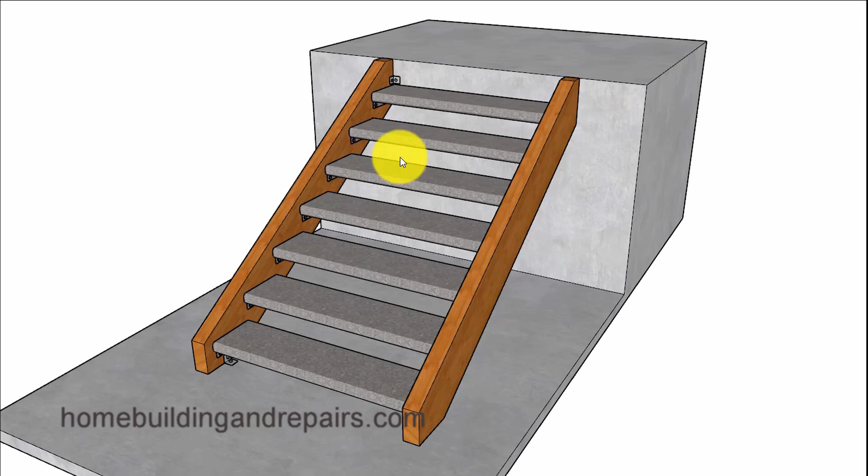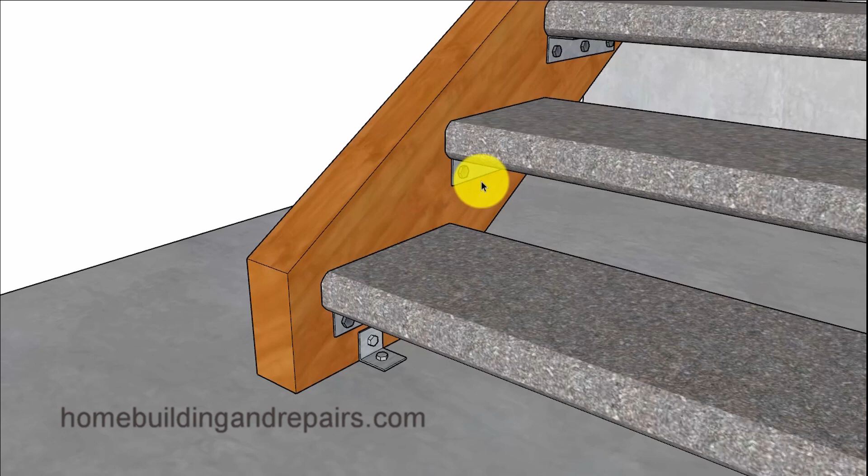In this video, I am going to provide you with two different types of concrete treads that could be attached to a wood stringer with metal brackets or even metal brackets attached to metal stringers. And these are the most common ones that I worked with.

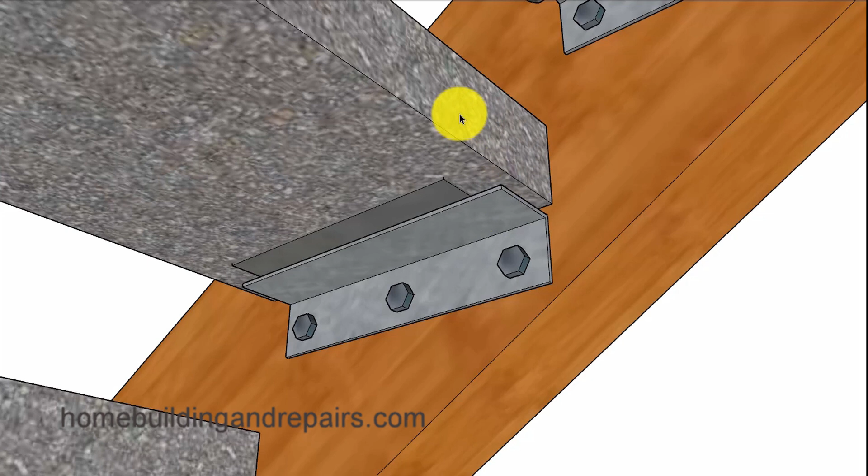And this would be a concrete tread with a metal plate located somewhere on the side. And then the treads would be positioned in the right spot and then welded, and are usually going to be the easiest ones to make small, minute adjustments to in case the stringers aren't located in the right spot or the brackets when building stairs like this.

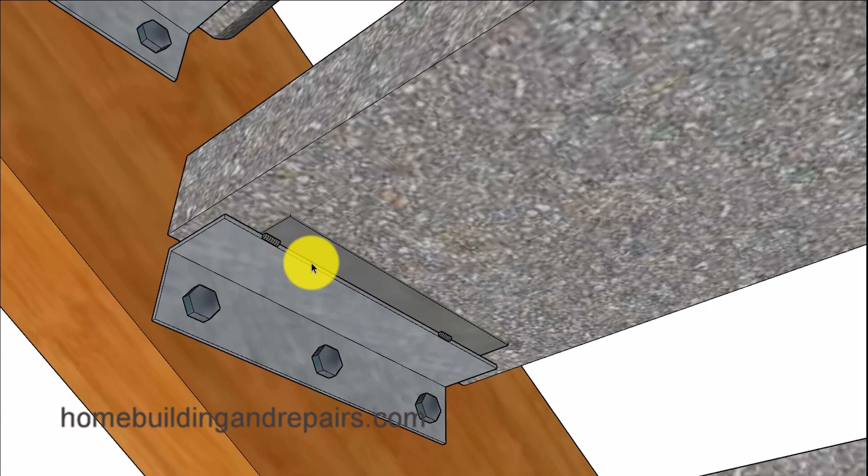So metal plates on both sides, and then they were often just tack welded in maybe 1, 2, or 3 spots. However, I have seen them welded all the way across. And that seems like it would be the best way if the tread and the bracket wouldn't separate somehow from all of the heat. And I have seen these welds break. So here's the tread, here's the metal plate.

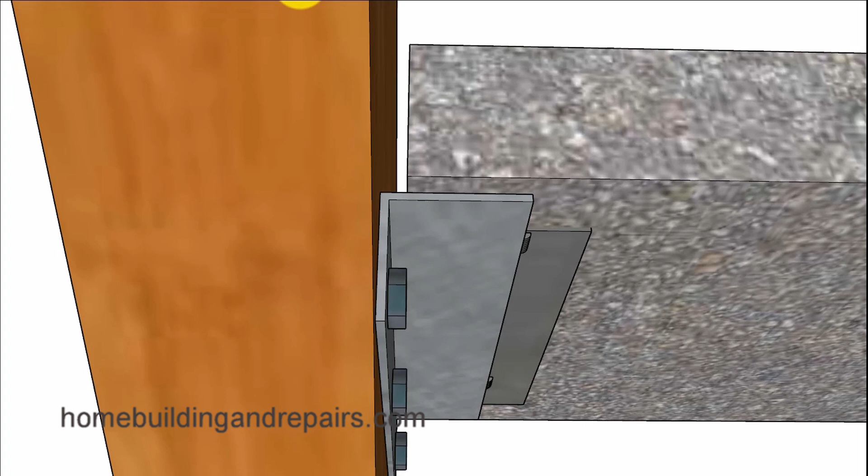And if you were looking for something like this, they can usually be found on the internet under precast concrete stair treads. And it's always going to be a good idea to have about 1/4 of an inch to a 1/2 inch gap between the wood and the concrete, just in case the concrete absorbs some moisture and then transfers that moisture into the lumber over a long period of time, causing it to rot. And of course, that was usually my job, to replace the wood stringers and reattach the concrete and the brackets to them because they were not maintained.

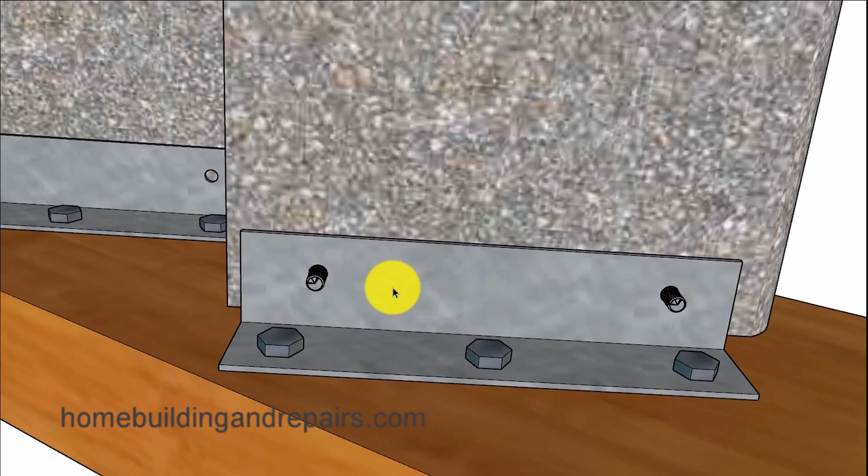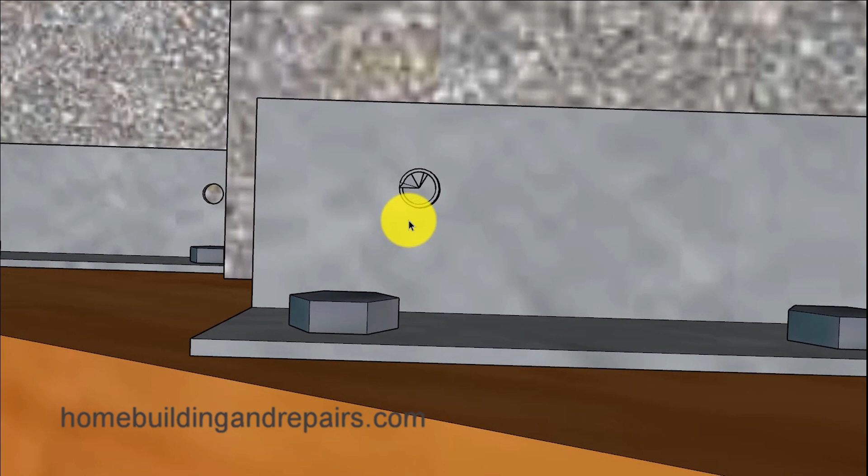And the next method for installing precast concrete treads would be to have a couple of bolts sticking out of the tread that can be attached to a metal bracket. And this is one of the reasons why I'm making the video, to point out that these brackets need to have some type of a slot in them or a larger hole. Otherwise, you're going to have a difficult time attaching the treads, because if these brackets are off just a little bit, you will not be able to install the tread.

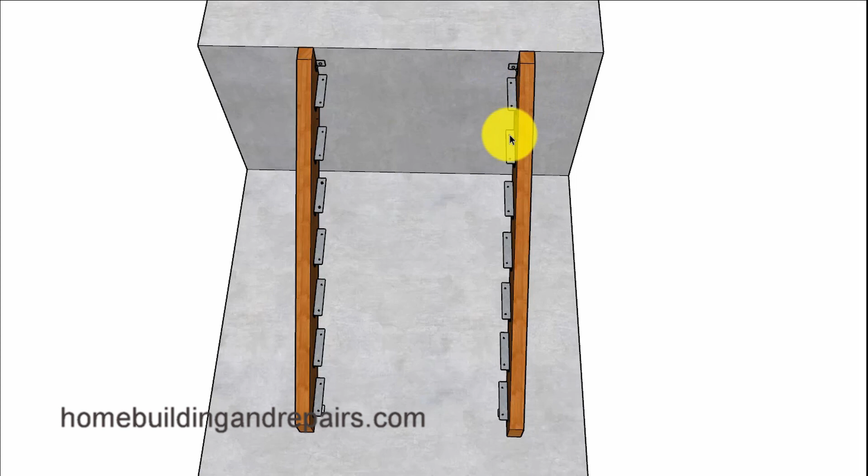And even if the brackets are installed in the exact same spot on both sides, then you would need to make sure that nothing would be out of square up here, or that the stair stringers were installed square to the surface that they are going to be attached to perfectly. And this is why I wouldn't use this process.

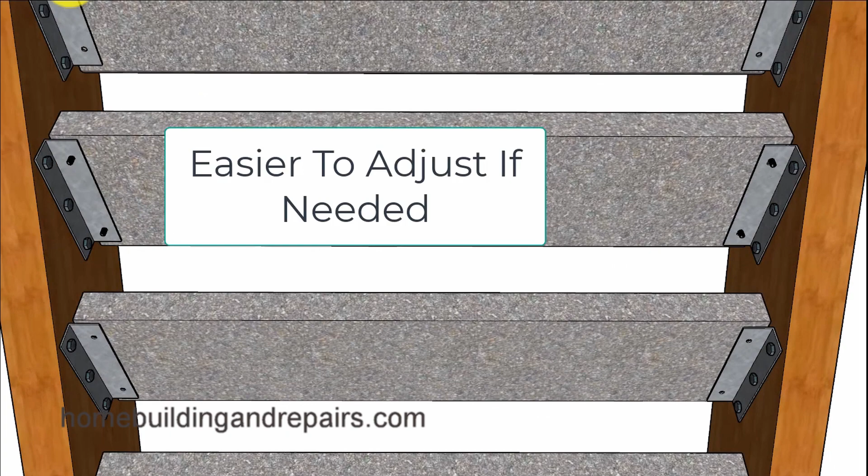I would use the treads that can be welded to the brackets, so that I didn't end up with something like this and try to tweak the concrete stairs to where you're going to force these bolts in here. That'll create a lot of pressure for the bolts in the concrete treads and possibly cause them to crack, or remove the lag screws so that you can reposition the metal bracket and then try to reinstall the lag screws, and hoping that they are not going to try and go back into the original holes.

For example, if you do need to remove the bracket and move it over about 1/4 of an inch, there's a good chance that the lag screws aren't going to go in straight without pre-drilling some holes, and that could create a weak connection here and cause the bracket to fail in the future. So what would the solution be? Bigger holes or slots that would allow the treads to move from one side or the other if needed.

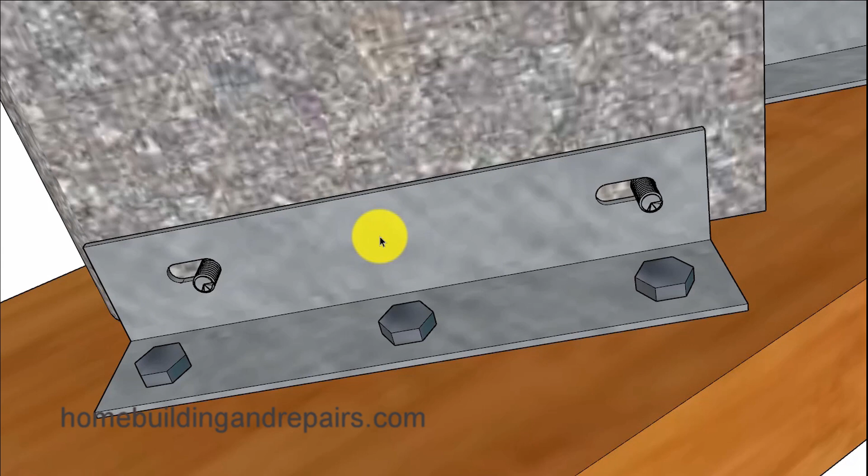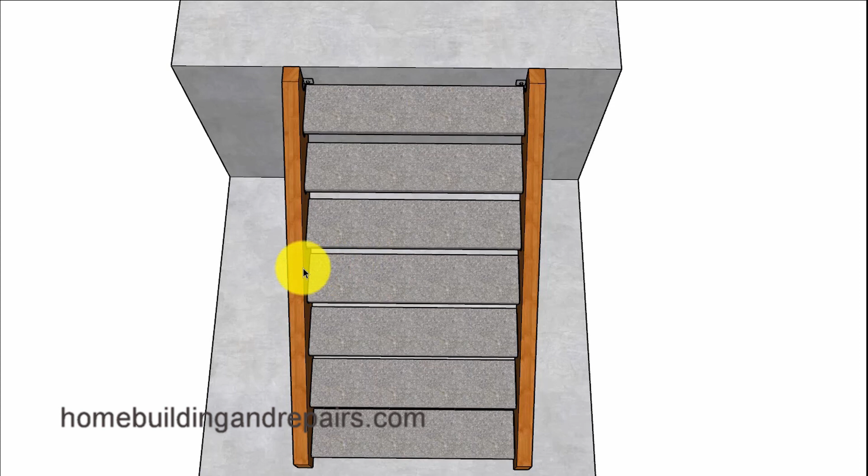And now for those of you who are thinking, awesome, this is exactly what I'm going to do, then go for it. However, keep in mind that, as I stated earlier in the video, this would not be my preferred method, because it can be a nightmare, even with the slots, because the width of the stringers will also need to be right on the money. For example, if it needs to be 37 inches on the inside and you're 36 3/4, or it's 36.5 inches at the bottom and 37 3/4 inches at the top, then you're going to be breaking out the pipe clamps to pull the stringers together, or some type of a spreading device to force them apart.

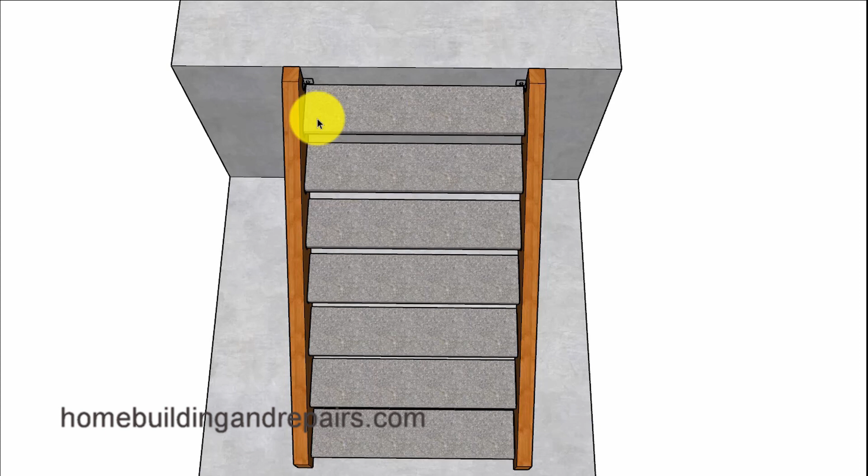However, I do understand that the concrete steps with bolts already embedded in them will not require a welder, and will be easier to install for those people who do not know how to weld. Now, one more thing I want to point out before I end the video will be that if the nuts get loose, which they do sometimes, and you have slotted brackets, you could end up with stair treads that move. Again, providing us with another advantage of welding the brackets to the stair treads, providing us with a safer set of stairs.